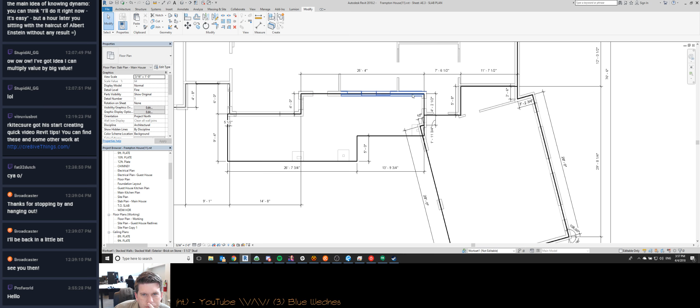So I think this is what I need right here for this. Yeah, I think that works. But I wonder if that'll be poured all as one. There'll be a slab here. Or...

Oh, I bet your English is better than my whatever your primary language is. Either way, welcome to the stream, and feel free to ask questions.

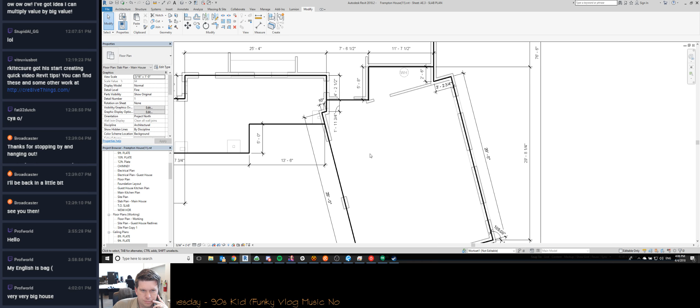Right. Right. Right. Yeah, well, yeah, I mean, whatever you think would work, just let me know. We can work something out.

Okay. Right. No, yeah, no, I know what you mean. I was going to ask, is that more a reflection on Evan or the coach?

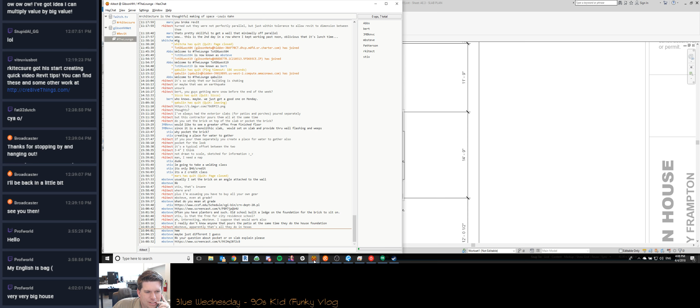Yeah. Yeah, yeah, absolutely. Right, yeah, yeah, I was just thinking about that last night. I was just thinking about, are you a good coach because you have good players, or are you a good coach because you created good players? You know?

Right. As a team, or you mean as a team, or like him at home, or both? Yeah. Yeah. Right.

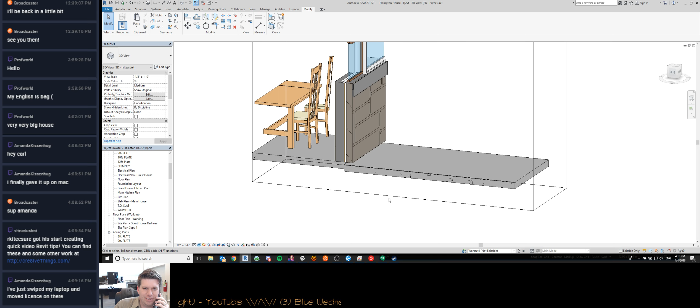You still there? Sounds like I might have lost you there. Barely, can you hear me now? All right, yeah, that's better. Yeah.

Well, have you talked to Ed much recently? Yeah, with Brandon, I didn't realize who it was until I was talking to Ed the other day. It was the guy that was coaching the team that beat us in that tournament, right? The bigger guy, I thought it was no, Brandon McComb. Yeah, in that last Highlanders Cup game that we played, where we got whooped up on, it was like 6-2 or something like that in the final.

Was that not the same guy? Yeah, not the same team, but that guy. Yeah. Yeah. Yeah.

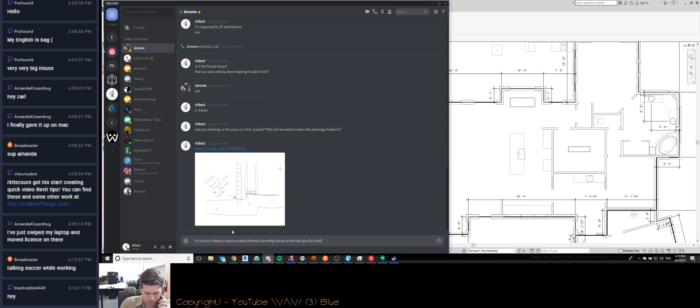Right. Yeah, I wasn't sure if that was an option for you guys or not. Yeah, no, I don't, I don't doubt that. Yeah. Right. Yeah.

Yeah. Maybe that's what Evan needs to ask him. Right, no, I understand, yeah. Right. Okay, and that's fine, yeah, and if you want to just let me know what works for you.

I don't really have anything in my schedule right now. We can do it during the day or after. After work's going to be pretty tough. Maybe like Monday or Friday, or over the weekend. No, that would work, I think that would work out fine if you want to do that.

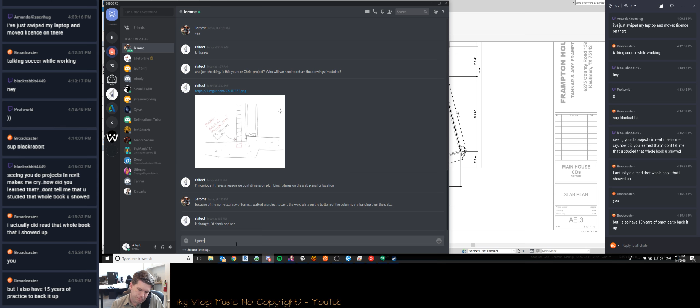Yeah. Okay, on Sunday. Yeah. Yeah, so Joel texted me and said, 'Hey, every '06 is playing Saturday morning, either at 9 or 10:30.' I was like, 'Oh, well, maybe I'll check and see who else is playing.'

Turns out Gunner's playing. Gunner and TJ are playing at 10:30 at Titan also. So half of the '05s and all the '06s are playing at Titan at the same time on Saturday. And I was like, well, that's a pretty good opportunity right there. So then I started texting other people to see who else is playing. And since we don't have any games this weekend, I figured I'd just probably go spend some time and check out, see how everyone's doing.

Is he at Union? I was gonna say, is he doing the tournament? WSA's got a tournament this weekend.

Yeah, absolutely. Yeah, yeah, you should. Right, yeah. Okay. Sounds good, just let me know. Alright, talk to you later. Bye.

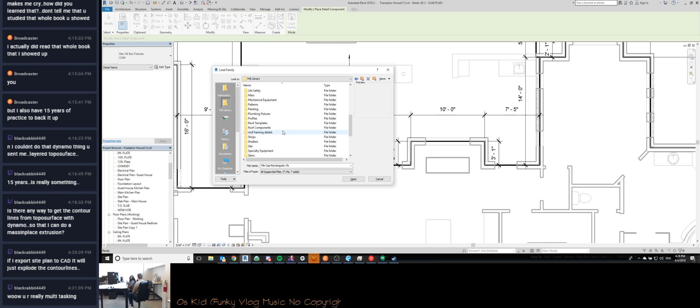Okay, I remember having the same thing and I'll have to copy it from another project. I'll have to open up the Churney project, I guess.

Oh man, the joys of having a family library. You never know where anything is. There's really no point in having a library because the only guaranteed place you know it is in the last project you used it in. It's like the only guarantee. Where's that family? Well, what's the last project you used it in?

Oh man. Unfortunately, I'm trying to get my W2 last minute, so I've been trying to get that done but haven't. I would try to do it. Yeah, that's fine. Are you going to be out for the rest of the day? I guess it's 4:30, isn't it? Okay, well good luck, drive safe.

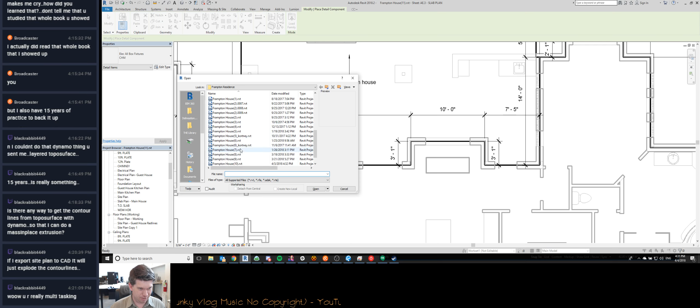There goes Courtney. It's amazing how much louder those speakers are, just that sound, than when you have your phone running through it.

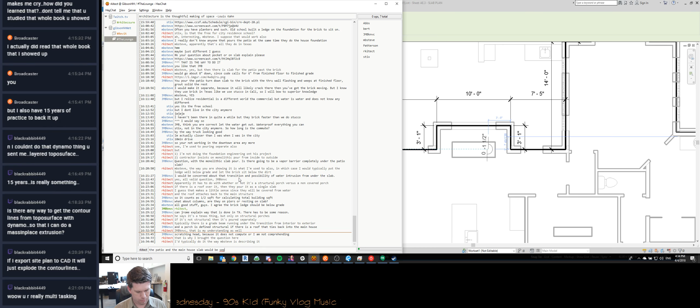The firm name is Delineations Tulsa.

Have a good one, Courtney. You still got plenty to do on that one, right? Alrighty. Nope, had it right the first time. Courtney with a K. Said the man with Amanda name in Twitch chat.

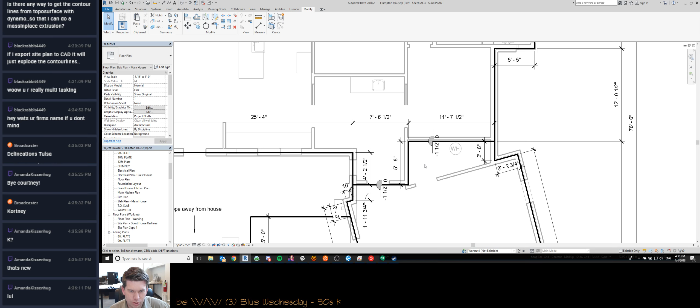See, I don't know if they're gonna pour this all together or not. So here's— I know it is. And I'm just giving you a hard time.

Well, first of all, the way it's presented, right? In The Simpsons, it was spoken.

Really? You're surprised? I'm not surprised at all. But the funny thing is that they're mostly that way behind a wall. They think they can get away with it because they're behind this digital wall.

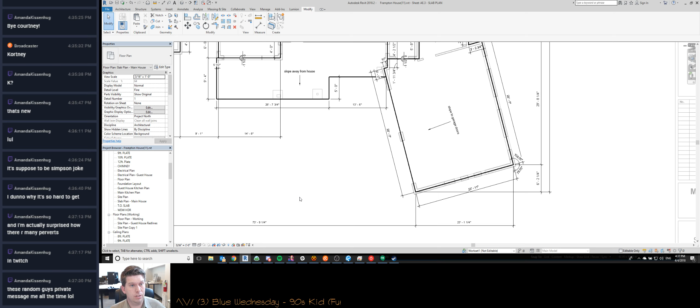So my oldest son is 8, and he's started playing a game called Prodigy, a math-based fantasy game where you answer math questions correctly to do combat, fight things, and win prizes. He was playing the other day and said, 'Mommy, I got a friend request.' Joanna just goes, 'Just click no, you do not accept any of those.' Oh man.

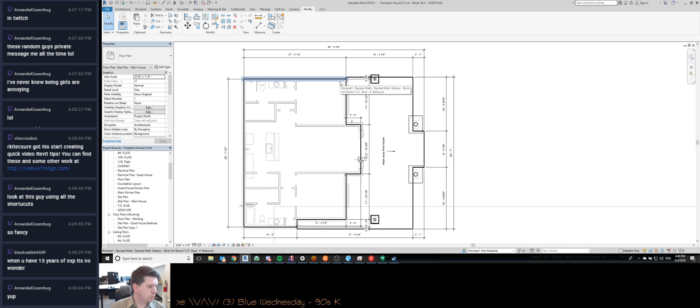I don't know why this is so thick. Because there's a floor in there, that's why.

Finally upgraded to 2018 just in time for the 2019 release, huh? Revit 2019, rep download—is it up yet? Oh, recap is up. Looks like Revit is not up yet, just AutoCAD, 3D Studio, Navis, Recap, and Inventor. Somebody was asking about Inventor the other day. Yep, every April is the new release.

Why is this 5 3/4 and the other one's 5 1/2?

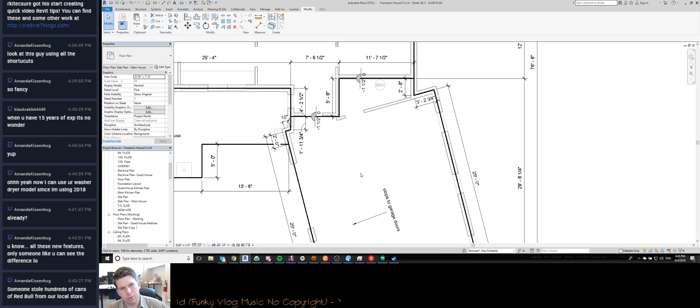You know what I really need? I need this to flip. That's what I need. I need to do this and need it to flip. Control. Put it on the bottom side. Try it again, let's try one more time. Create control. There we go. Let's load that back in. This is what I needed to do right here. That's what I want.

You know, I was in a gas station one time when somebody stole a bunch of Red Bull. Apparently they're very valuable on the black market. Kind of like washing detergent.

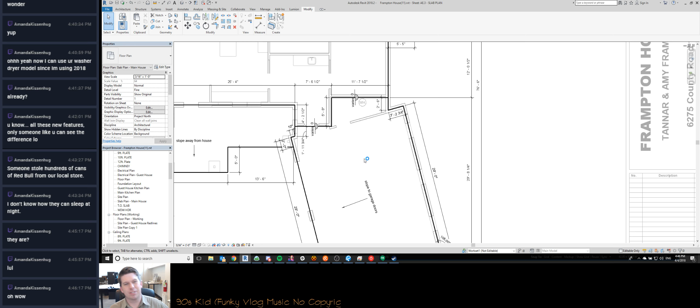And so the guy was expecting to be able to push out the door, and he just bounced right off of it. The police came in and arrested him. He was bloody. He hit that door with force. He was not expecting that, man. My buddy and I, we just bought our drinks and left, and it didn't really hit us what had happened until after we were driving out, and we were like, oh man.

That's crazy. I think I need to do this.

So I know a lot of times it looks like I'm just sitting here staring at a plan, but I'm actually thinking through what's the rest of the story that needs to be told here. A lot of this is just kind of thinking through how it's going to be built. What information am I missing? I'm always missing information, but I try to minimize the amount of information I'm missing when I do this. A lot of what I'm missing here is we're not doing the foundation, the engineering on this.

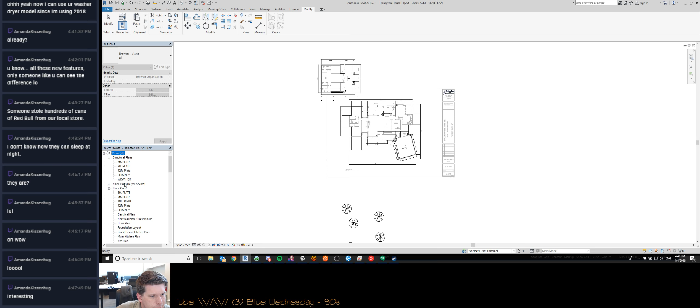But first I have to remember what the crap I'm doing here. Slab plan, main house, duplicate with detailing, and this will be guest house. So here's what we're going to do.

Also, if any of you work at Autodesk, this is the worst place to put grips. Put the grips on the corner so you can do multiple sides at once. I could do this resize in 2 clicks—one right here, click, drag, done. But now I have to do it in 1, 2, 3, 4, which is ridiculous. You're doubling the effort for everything when it comes to cropping and resizing views.

Alright, I don't want to reissue anything for this. So, let's see.

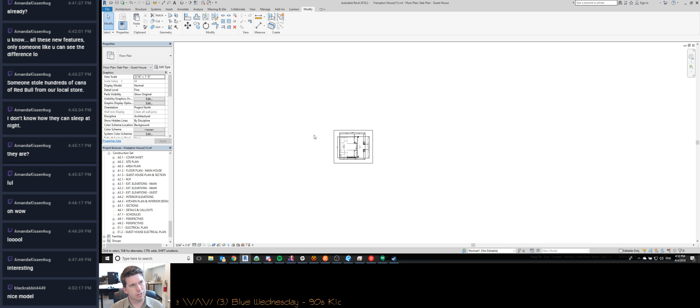Thank you, sir. This has actually been a fun project to work on. This is actually my first fully custom designed house that I've worked on from beginning to end as mine that I can say. So I'm pretty excited to see this one get done and get built.

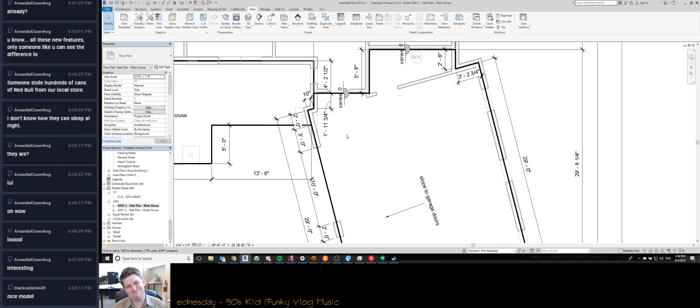This is a really tough area here because if this all slopes here, it's going to pool right here.

I do want to go ahead and put these stem walls in. I am a fan of the stem walls. Concrete. I do not have a 6-inch concrete wall. That seems a little weird. Duplicate. Concrete. 6 inches. Finished concrete, that's fine.

What I'm going to do with this is let them sit 2 feet below, and they're going to sit at the top of the slab. Finish face exterior is fine.

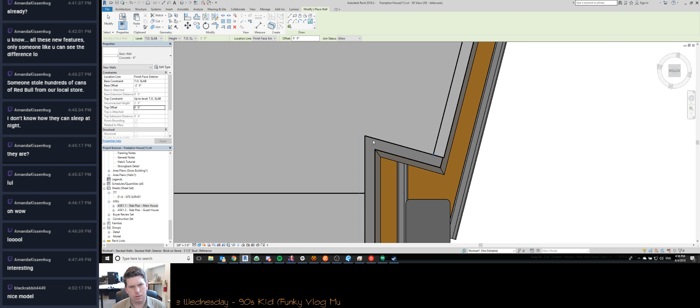Oh my goodness. Go. There we go. There we go. Come on. Oh wait, am I on the wrong one? Oh, what happened? Was I wrong that whole time? I was. Oh, I'm really confused.

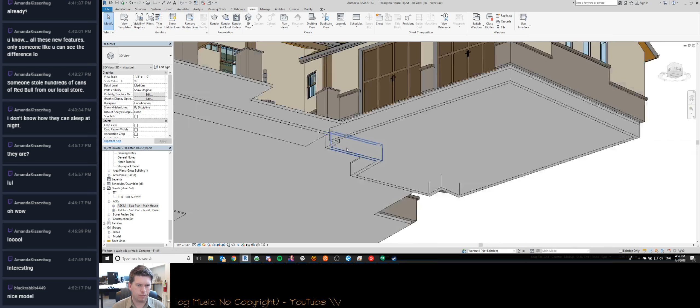Oops, that's not going to work very well. Alright, so what that did for us is there's no wall right here. That one goes away, it's just this one. This one right here, that's the only one I need. And then this one right here. So then what I do is I go in, I have a filter that I use.

So what I want to do is leave all the walls non-poche, but all the walls that are this type right here, I'll override by filter. New filter, and we're going to call this concrete stem walls, concrete walls.

You make construction drawings from Revit, right? So when you make a model, do you build columns and beams also? I do. I'm going to assume you mean the shorthand for drawing and not an actual DWG file.

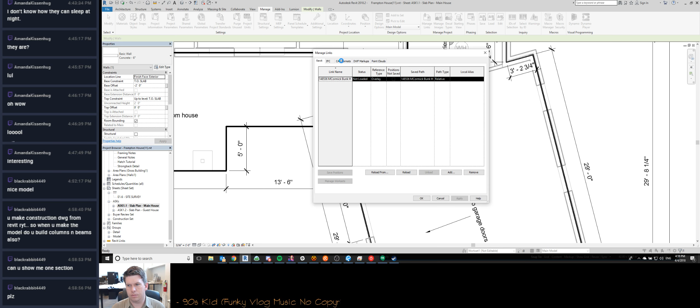Filters, add concrete walls. I need to edit this because I didn't actually filter walls correctly. Filter by family, type, family name equals, type name equals concrete 6-inch.

All right, so we're going to have a filter here that allows us to do transparency 0 and projection surface color gray solid. Okay, that should make - boom, that's what I'm looking for. So you see I've got a poche now on the concrete stem walls.

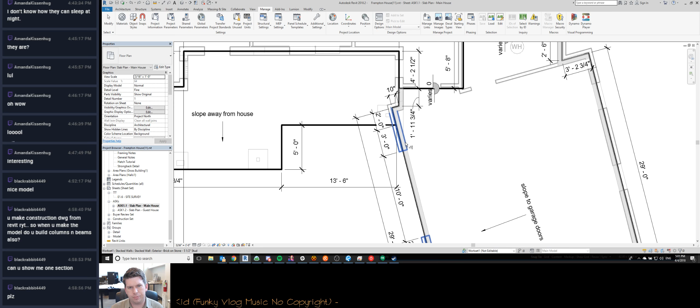Okay, that didn't do what I wanted it to. Let's try it again. There we go. That's what I wanted it to do. That feels like it's not doing what I want it to. You too, Holly. Feel better. Rest up.

I'm trimming something that's not supposed to be trimming, and it's not actually doing it, which is the problem. Now Revit's just messing with me. I don't know what it's doing.

So when we make a beam, a wall will go up till bottom of the beam, and there will be another wall on top of the beam, right? I mean, if that's the way the structural is doing it, then yeah.

Why is this not understanding? That's what I wanted to do, but Revit's just making it difficult, I guess. I want to do it. Okay.

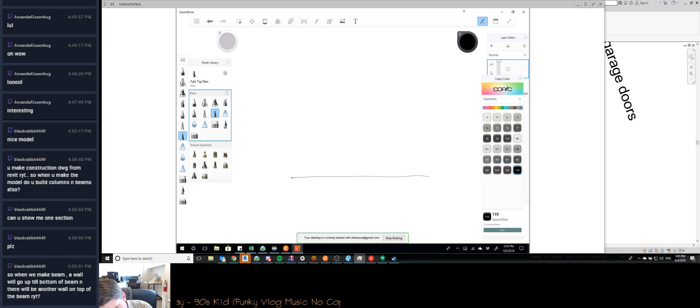So the way I understand it is that you're asking: when you have a column, your column goes up, and we'll say it's a wide flange column. Okay? And then you've got another beam. You've got a beam, and then you have another wall sitting on top. Is that what you're asking?

I mean, typically you're also going to have a floor structure of some sort, and then the wall sitting on top of that. You typically won't do a column-beam-column connection like that unless you're doing something a little bit different - you're going to have a floor system somewhere in between. But is that basically what you're getting at?

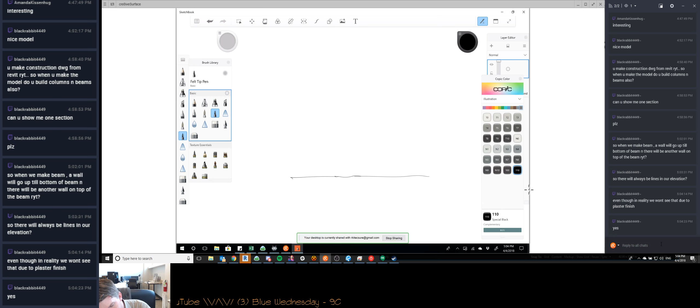Okay, so you're talking like an exterior condition. By the way, I don't know which part of the world you're from, but that also depends on the type of construction - is it concrete construction, steel construction? But I think I know what you're talking about now, because I was just dealing with this the other day.

This will be some kind of formed concrete - it'll be a deck or something, I don't know, whatever, it'll all be concrete, right? You've got a pan form right there, and another wall on top.

And you're talking about from this direction, you're going to plaster over this so that you don't see that - you're basically going to have another layer on top. And what I was telling somebody earlier is that you need to consider that plaster layer in your model, right?

So there's a couple ways you can deal with it. One, you can model that plaster layer, or two, you can paint and join, right? So what I'm going to do is open up a different instance of Revit so I can keep these separate, and I'll show you what I'm talking about.

For some reason I can drag these guys, but it doesn't... okay, well I guess I'm saving that.

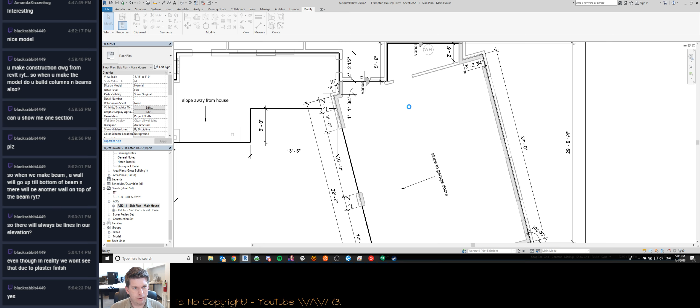But do I have this basically right? If it's concrete, you'll have some kind of deck and form that basically stops. So you've got steel right there, or you'll form it, you'll do a board form. Is it concrete that you're dealing with? That was interesting.

Okay, so I'm going to do this in 3D here. Let's see if I can find a concrete wall. We don't even work in concrete, so I've got to make a concrete wall. Let's see, I'm just going to do generic, duplicate, concrete, 8-inch, and we're going to make this 8-inch. I don't think concrete's a valid name, so I'm going to go find a concrete material.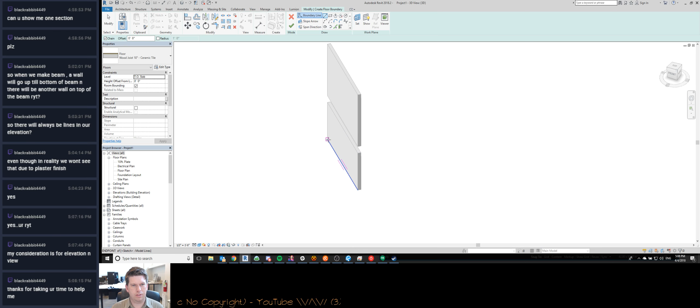I'm actually going to do this right here. Oh boy, no, I'm not. I could have made this a lot easier on myself, but it just doesn't seem right, I guess. Alright, and we're going to make this concrete floor. No, we're not, we're going to make a concrete floor, and we're just going to make concrete 12-inch. We'll say it's a really thick concrete.

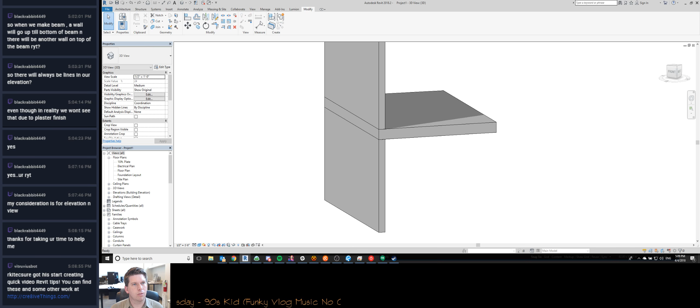Okay, I'm going to make these the same material. And we'll say this is actually on the 10-foot plate level. Right, and just for simplicity's sake, I'm going to bring this up to here. Right, so we've got something like that right there. That's not technically accurate, but it's close enough for what you're asking, I think. So if I use the join tool, just join these guys, you can see that we still have the separation in section, but in elevation, those lines are gone. So that was the join tool, which is this right here, join geometry, like that, okay?

The other option is, if you're going to have a plaster, right, so then you go and you make a plaster wall type, duplicate, I'll just call this plaster finish. Oh, this is interesting, I wonder if this is going to pick up as a copyright. We'll see. So I'm just going to leave this as generic, I'm not going to worry about a material on this. But essentially what I'm going to do, it's very thin, it's just whatever the thickness of the wall is. And what I'm going to do is I'm going to finish facing.

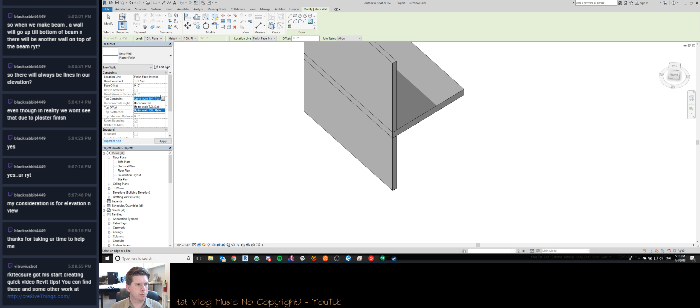I'm going to do finish face interior. We're going to say that it starts at top of slab and it goes up to 10-foot plate to 12 feet. And what I'm looking for here is, you see the dotted line, okay? Depending on where my cursor is, it's going to be on the inside or outside. I know that where I'm picking is going to be the interior finish face of this wall. So if I click out here, the center of the wall is going to be where the dotted line is. And there's my plaster wall right there.

And you can see as I start to rotate, Revit has a hard time kind of dealing with the geometry. But if I zoom in, you can see it's a flat surface that sits right on top. And I can actually do a crop on this. There you go, so you can see that that's technically what it would look like, right? You've got 3 different pours with it sitting on top like that. So I think that's what you're asking. Hopefully that gives you an idea of a solution that you can use. You can see how poorly I drew that in the plan view there.

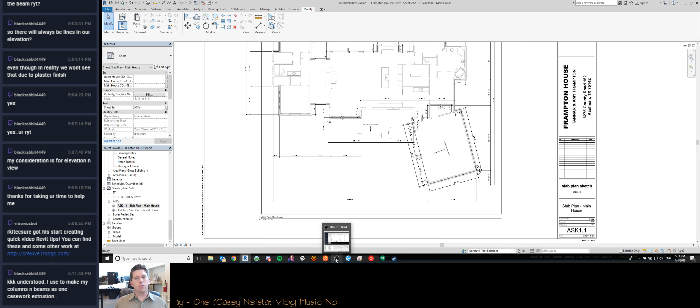Let's see, was that what you were asking? I used to make my columns and beams as one casework extrusion. Hey, if that's what gets the job done, you know. The one thing that you want to consider though is that depending on what you mean by columns, if you're actually doing like straight columns,

Let's turn off section box. So if you're doing real columns, oh man, there's no columns in this family. Alright, let's go with structural columns, and we'll go with concrete. I never saw an answer, is it concrete that you're dealing with? Vertical columns, do height, top of slab to 10 foot. Hit, top of slab to 10 foot height.

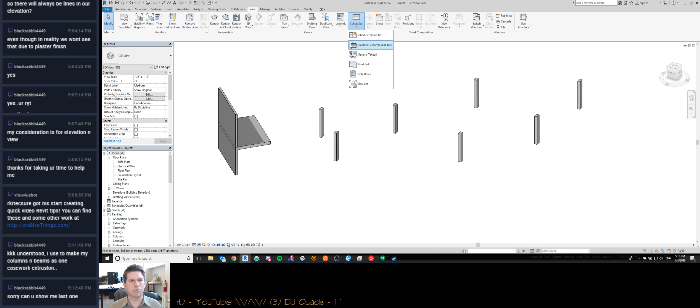Go. So I'm going to place a bunch of columns in here, okay? And these are actually, if I hover over them, structural columns, right? And if I go into schedules, view, schedules, graphical column schedule, did I miss something, or is this not set up right?

Oh, there's no levels. There's no grids or anything. Well, that was poorly executed. Alright, let me try that again.

So I'm gonna... By the way, if you use Dynamo, you can use it to create grids or columns at grid intersections, which is nice for when you keep moving things around.

What was I looking for? Structure, column. I'm going to drop those right there, and then I'm going to copy this a few times. We'll just say 20, 25, 20. All right.

And then graphical column schedules, so then you can see that it actually shows the columns there, right? And if I take these, 1, 2, 3, 4, you can see it's highlighting them in the schedule, right? And I'm going to copy those, and I'm going to paste that aligned to top of slab.

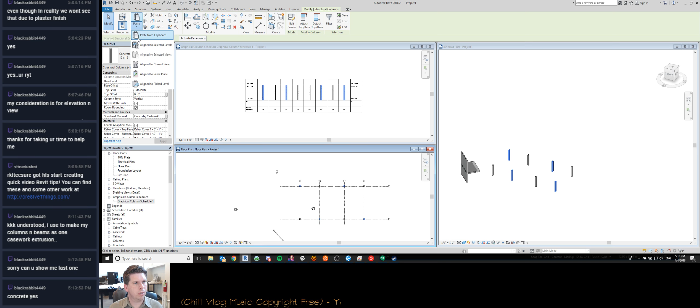Oh no, I pasted them in the wrong place. Control C, paste align to selected levels, 10-foot plate. There we go. You can see that it automatically adds this, right?

So the graphical column schedule will update if you use actual columns. You cannot generate this automatically if you use casework. And vice versa, if you try to get a casework takeoff, then you're gonna pick up your columns also. So keep that in mind.

There's nothing wrong with using... how to make columns and beams. How do you make the families? There's families already loaded in Revit, so you should be able to place these. And then the beams, there's beams also. So if you hit beam, and if one's not loaded, you can hit yes to load.

And then under structural framing, in this case concrete, rectangular beam is right there. And then you can literally just go in and use 3D snapping to draw your beams.

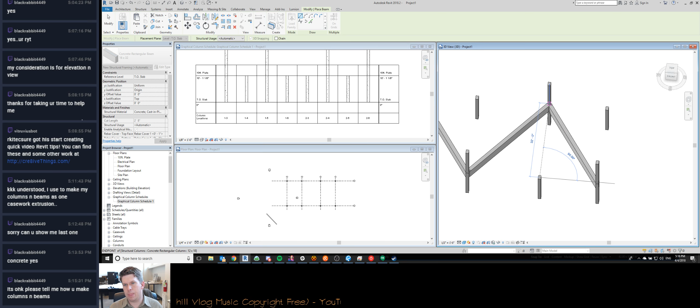So I think there might be maybe a language barrier here that we're not quite capturing in this conversation. I'm not really sure if I'm covering what exactly you're trying to find out. I have no problem stumbling through language barriers to figure out what it is you're trying to learn how to do in Revit, and I'll gladly help if I've got the time.

But those should already be loaded with your Revit install, so you should be able to go to the library. So again, file—or sorry, insert, load family—and then you should have an imperial library or metric library, sorry, with structural columns.

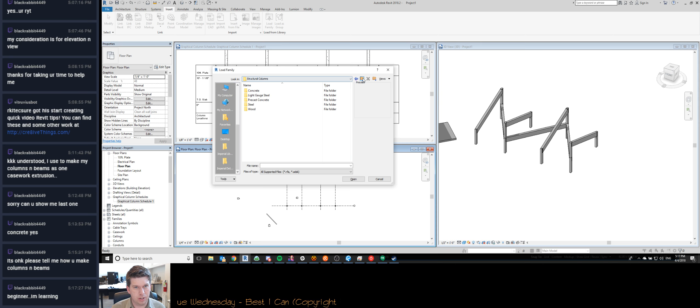No, that's fine, Black Rabbit. Let me ask, what region of the world are you joining us from? Because the libraries are different depending on where you are and what you downloaded. There's tons of different libraries. So you can see I've installed quite a few of them.

There's a UK, there's an India library, right, which looks very similar, structural columns. There's all kinds of libraries. I think I have the Australia library, the UK library, US metric and imperial, and it looks like I have the India library also.

You can join them. I mean, you can join just about anything in Revit. If it's the same material, the joints will disappear, and if it's a different material, then the joints will remain.

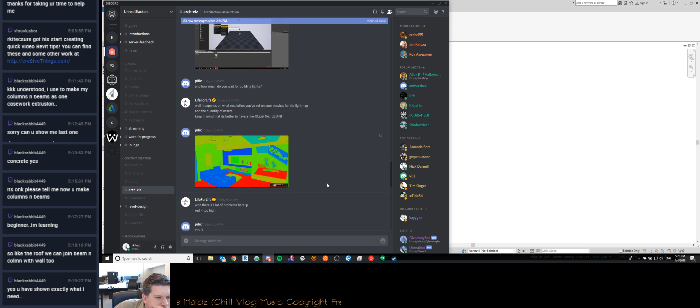Sorry, I'm reading through this.

Alright, it's getting a little toasty here. I'm going to see if the air conditioning is right. Can you show me how you made plaster with wall?

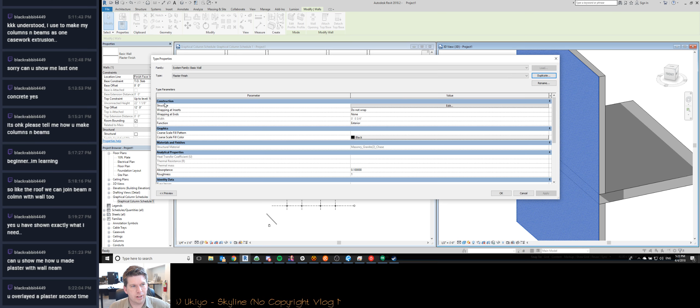Yeah, so it was just a wall type. Create a wall, and you just duplicate whatever the wall type is, call it plaster finish or whatever, and then you edit the structure, and then you put whatever you want in there.

In this case, it's just—and you have to put it within the core, but I should probably make it finish. Okay, but it's within the core, and then you can make this whatever material you want and give it a thickness, and that's it.

You know, you could also do this if you wanted to be real fancy about it. So we're going to take these two walls, and we're going to create one called concrete 8-inch with plaster finish. Okay, and I'm going to edit this.

I'm going to insert a finish layer on top. All right, and we're going to say this is 3/4 of an inch. Sorry, it's in inches and not in metric. That's just the way I roll.

By the way, Amanda, are you still watching?

Amanda, if you're watching, let me know. I've got another joke for you.

Let's see if there's a plaster material in here. There should be - finishes, we'll call it stucco. Notice we've got just concrete walls here.

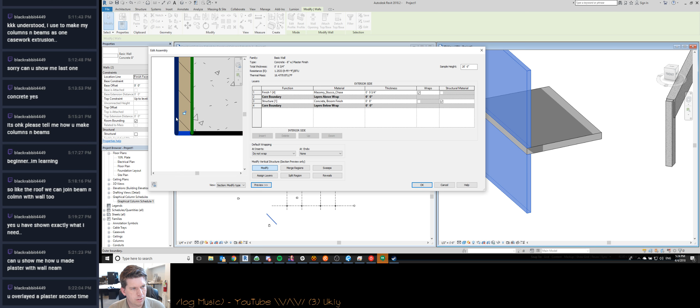I'm going to change this to section, and modify this so we can take this layer and stretch it down. All I've done is unlock that bottom layer. You can do that with any of the horizontal layers, top or bottom. I'll hit OK a couple times.

So now I've got the plaster finish, but you can see I've got two arrows right here, and my lines are a little messed up. That plaster finish should be outboard of the concrete now, so what I need to do here is...

I'm going to use the align tool, hopefully I'll be able to do that right there. Uh-oh, that's not what I was hoping to do. Let's see if it'll let me bring this out. No, it keeps moving the floor out.

Okay, so I'm going to align this there and lock it so it stays in place. Now I'm going to align these guys. All right, so now you can see I've got that gap right there.

Now what I can do is take this arrow right here, which is controlled by this base extension distance, and drag that down to lock. If I know that distance, which I know is 1 foot in this case, I can say base extension distance equals negative 1 foot.

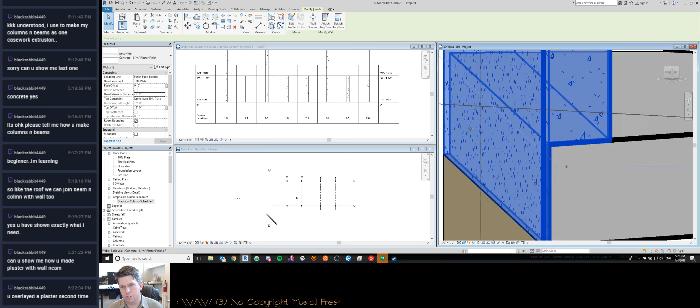I've still got a seam there, but now I can join those for a nice seamless finish - that's with 2 walls instead of 3. So if something were to change with the wall type, I could just edit the wall type and it would modify all walls of this type in the project.

So that's another option, which I think is a pretty sexy way to do it - pretty graceful. I think it's a good example of good modeling as well, and a good understanding of how the building is going together. So you can use that.

That one's for free. Another way, if you don't want to deal with a base extension and want to be less clever about it, is we can say this goes up to 12 feet. All right, so now I've got one wall and this concrete piece going through it.

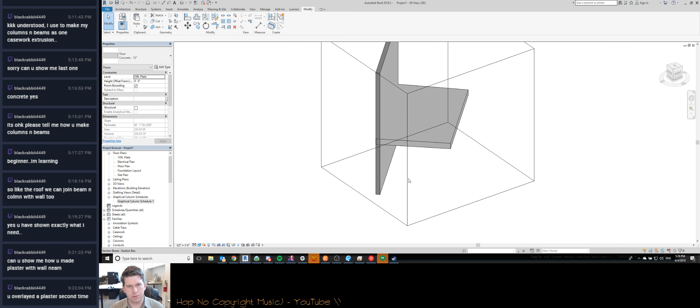Then there's another note saying the floor overlaps the highlighted walls - would you like to join geometry and cut the overlapping volume out of walls? I'm going to hit yes.

Okay, and then we can see what happens is... I can't remember how to use this software. Okay, I think I accidentally joined these. I'm going to unjoin that, and what I actually want to do is cut. Can I not cut? Unjoin, cut - I wonder if this is because it's sitting at a weird angle.

Let's see if I can get this to rotate so it's orthogonal. Let's see if this works now. Nope, I don't know, for some reason it's not letting me cut. Usually it'll let me just cut that - oh, what did I just do? Oh, I forgot you can do that.

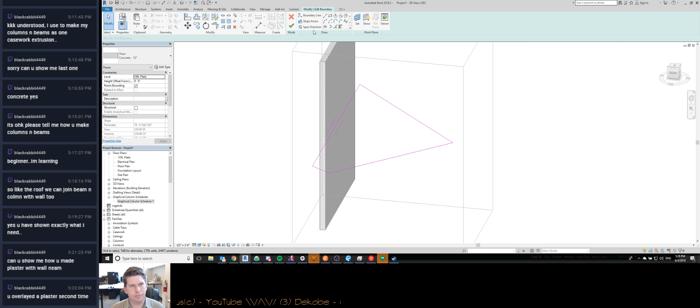No, typically it'll let me cut out of there, so if I make this a different wall type, make that wall type there. That's really weird - if I join them, it'll do that, which is kind of what I'm trying to do. Okay, so that is what I'm trying to do. If you join them, it'll actually cut that material out. So if I join them and they're the same material, yep, it'll do the same thing.

So now I've got that void right there where the floor cuts. I know that was really quick, but I have to do it quick because I've got work to do also. But you can always go back and watch the streams on the YouTube channel, Creative Things.

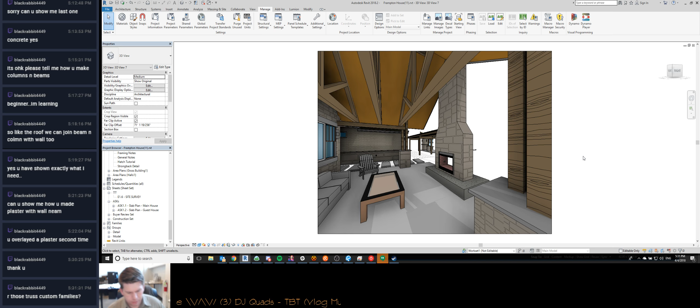Yes, those are custom truss families. In fact, I'm not even sure they might be in place. They are actually not even families, they are walls with profiles that have been edited.

I did not mean to do that. Missed a ring at 5:05. I bet it was Michael. Yep, it was Michael.

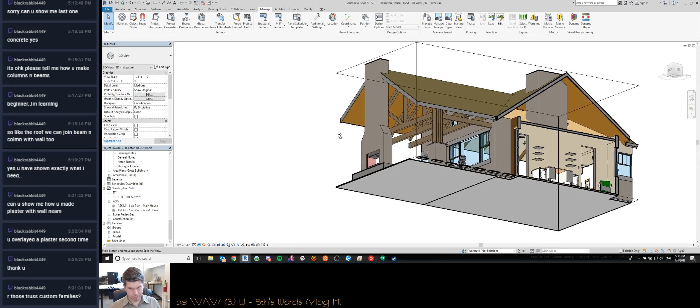So this would not show up on a schedule if I wanted to schedule how many trusses we had like that. I don't prefer doing it this way, but it was already available. So that's the way it was done.

You can make trusses like that using the Revit families, though. Using the Revit truss family works just fine.

I think that this is done. I'm going to put... what just happened? There we go.

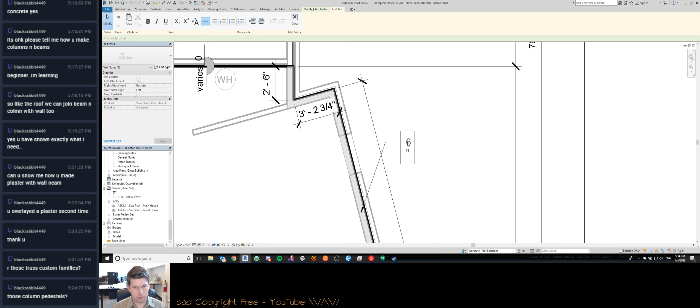Those column pedestals, these guys right here, it's just, so I tend to model things the way they're going to be built, right? So this is going to be a rock wall built around the column.

So that's what these are modeled as. They're modeled as rock walls.

It looks like I used a wall that I already had, so it shows wood studs in there, but they wouldn't do wood studs. It'd probably be CMU or something like that. I'll probably fill it with the CMU and then build the rock up around it.

No problem. Like I said, if it were bothersome, I wouldn't answer them.

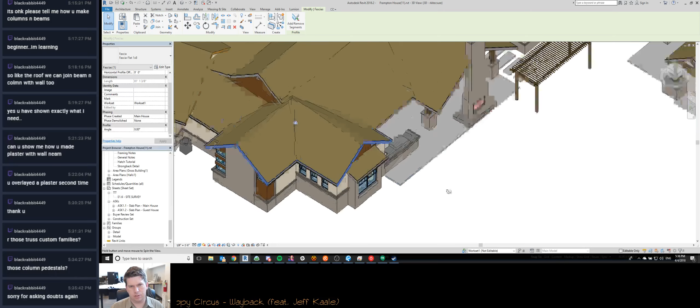I have a feeling that we are going to modify this right here. I think this is going to come down and out. In fact, I'm just going to go ahead and change that.

This needs to align with this one. Maybe like that. Fine.

Let's just make this a nice clean number here.

Yeah, and the problem, I mean, so there's nothing wrong with using AutoCAD, but you have to wonder if they really care to understand how a building is built, because AutoCAD allows you to just draw lines. You can just draw lines. You have no understanding of how it's being built, and just draw lines.

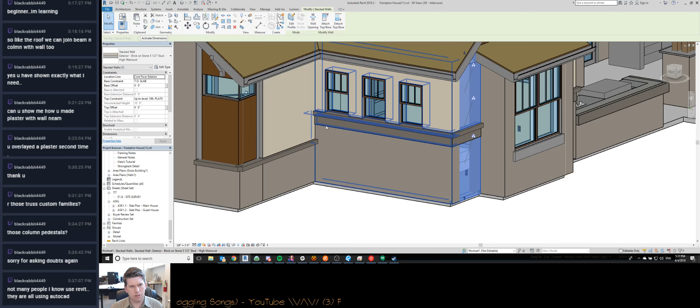But when you're modeling it in Revit, I have to understand all these connections. I have to understand how you go, how does this transition happen? How does this transition happen, right? You have to understand all these in order to make some kind of model that documents it properly in Revit. So I can't just BS the lines and hope that it works out okay.

So like, I know I've got problems here, okay? I'm gonna have to have a cricket that comes down and joins all this so that I don't have flooding issues right here, right? And it shows it in Revit.

A lot of, especially like the roof plan. Roof plan is always a problem with people who draw in AutoCAD because all they do is draw the lines. They don't understand how the slopes actually work. And they might think they do, but they can't come and verify it

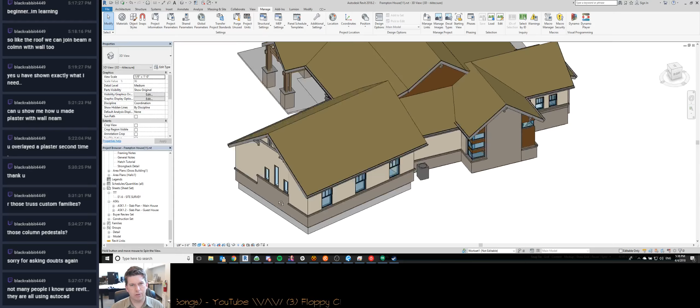with a model and say, oh, this is not what I want that to look like. I need to change this. So that's what Revit really affords me to do. It's very valuable.

I think... man, come on. I'm just about done with this, except I need to, why is this highlighted floors overlap?

Shouldn't overlap. Or do they overlap? Maybe because they touch? Oh, that's where they overlap right there.

That's awesome. Kudos to you for doing that.

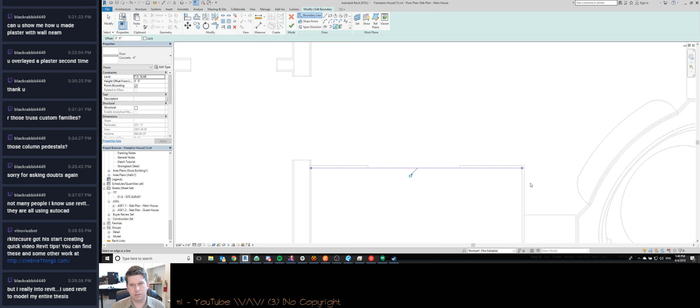Oh. I mean, so, and I say that because unless your thesis was on using Revit, then you were learning how to use Revit and the information that you needed in order to do your thesis at the same time, and that's pretty massive. So kudos to you.

But I do need to. Is this wall jacked up? No, it's not. A lot of these walls are still slightly off axis, so it's been a problem.